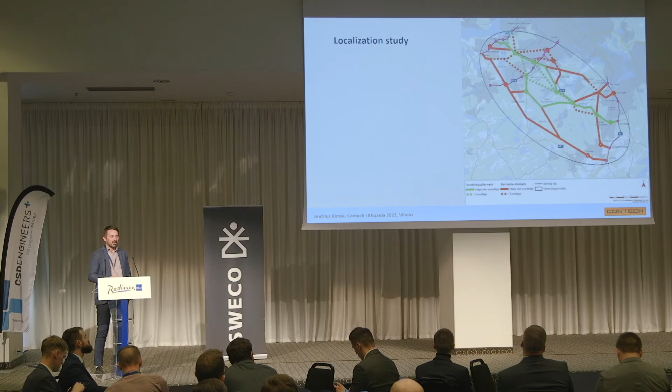A short example of how it operates in reality. When we're starting with the localization study, we're starting basically with some sort of political or economical decision. We need a road, which maybe starts there and ends up somewhere else, connecting two roads. And we're getting this spaghetti-looking plate of options, and from economical, political, social and technical points of view, we try to find the optimal way of localizing, in this case, a road.

The result of a localization study is that we came up with the most optimal line from all those points of view, and defined where we want to build the road, what kind of supporting structures we need, how it will be connected to the existing network, and so on. And then we go to the basic design phase based on that.

So the complexity of the digitalization, let's say, increases drastically, because previously you basically evaluate a lot of soft parameters, and then you're getting down to more or less technical issues. So normally what we do is a corridor kind of design, where we define what kind of road you want, how wide it should be, how many lanes, what should be in the middle between the lanes, how we form the ditches around, how we form the slopes.

In case of tunnels, how big tunnels we want. Is it 1 lane, 2 lanes, 3 lanes? Do we need any technical spaces and so on? So basically we're getting these typical sections. And normally, in a semi-automatic or automatic way, we can generate the layout of the entire structure we want.

So we're getting the vertical and horizontal profiles into 3D, generating enough detail in the design to be able to go to the public evaluation process: local counties, the normal public, any officials who have to evaluate the project. Based on that, we can start to work with environmental impact assessment plans, and a quite important and restricting factor, the land acquisition process.

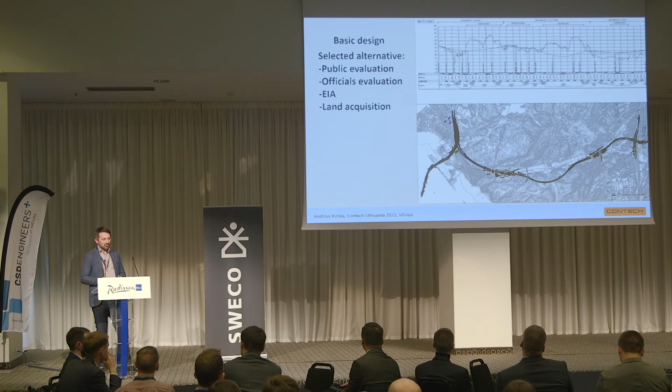So when we're at the stage of the basic design, we may be interested in a scale of meters, but then we go down to centimeters in the detailed design and have to solve all the small details. When it comes to tunnels, we do a lot of geotechnical investigation. We build our 3D models with the known existing structures, known weakness zones, or known variation in lithology or ground conditions, and based on that, define what technical issues we have to solve from the stability point of view.

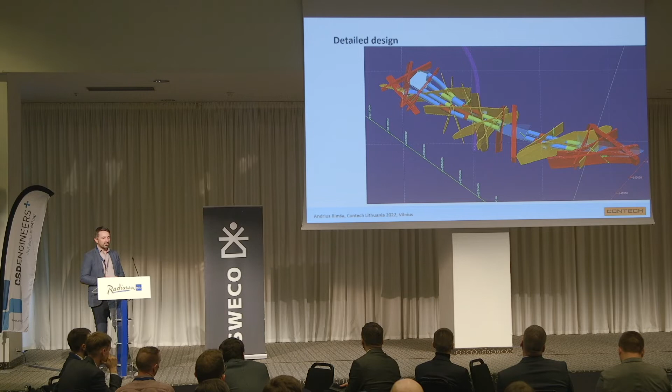The other thing which is important when we come to the detailed design is that tunnels are enclosed spaces. So we need a lot of cooperation and collaboration between the different technical areas to get enough space for drainage, electrical systems, ventilation, and structures in this combined tunnel space. So it's a lot of coordination work, even though from the technical or design point of view, a lot of it is basically semi-automatic processes.

We have a kind of defined straight reference line, and we adjust all our objects to that line, and all technical areas can collaborate in that way in this closed space.

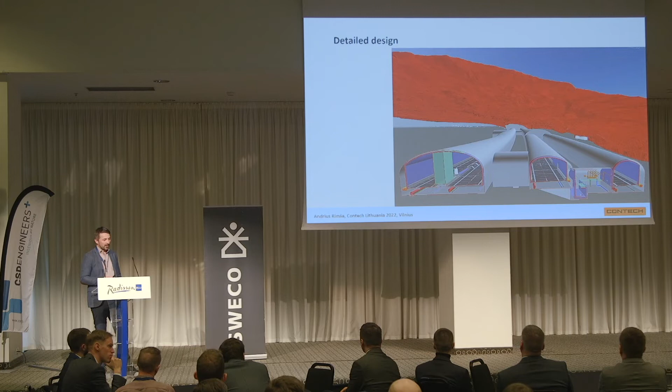So when we finish with our detailed design, we prepare the tendering documents, and normally it's a long list of paper documents describing requirements, what we want to be built, how it has to be built, and what kind of requirements have to be fulfilled by the contractor. And we prepare the bill of quantities.

We prepare 2D or 3D models as an illustration or as contract documents, and by tradition, as we used to do before, also even some drawings. Some drawings are just for illustration, but in some cases, depending on the degree of BIM modeling you do, maybe also address this time aspect for the construction period.

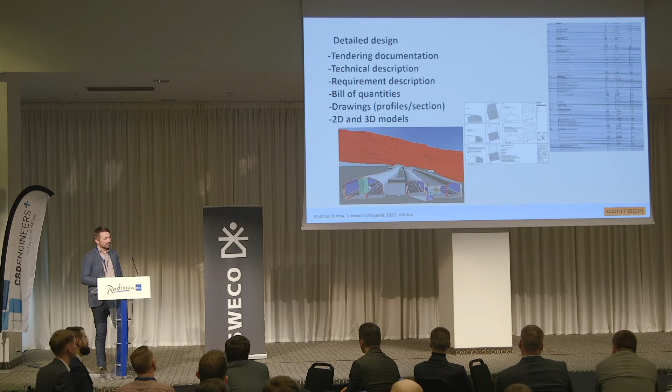So the contractor gets all these documents and then goes to the production site and starts building our tunnels. They follow the cycle: drilling, blasting, reinforcing, and going again. So in the end, we end up with a reinforced, structurally stable tunnel, which goes to the stage where we're installing water protection systems, usually shotcreting them for stability reasons, and then in the end, building the road in the bottom of the tunnel like any other road construction you're used to see.

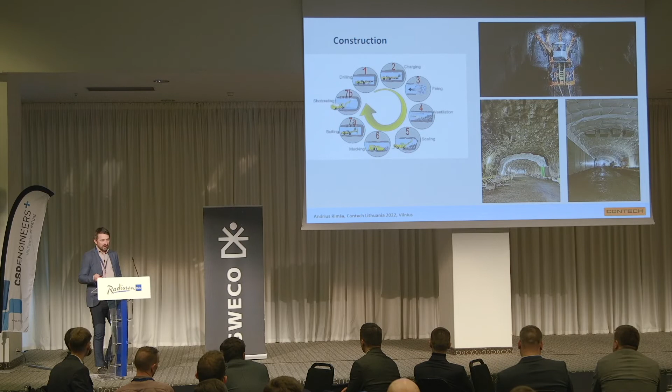What's happening after the construction period? Basically, the contractor finishes the construction works. It has to develop, update, and generate the as-built documentation. And unfortunately, from my perspective, and maybe from our clients' perspective, in Sweden at least, the as-built documentation is still done in 2D drawings, which are delivered at the end of the project.

One of the reasons is that the traffic administration is using a management system called BaTMan, Bridge and Tunnel Management System. And the limitation is that the management system can't accept 3D models. So that's a technical issue. It's continuously updating, and hopefully in the near future it will be possible.

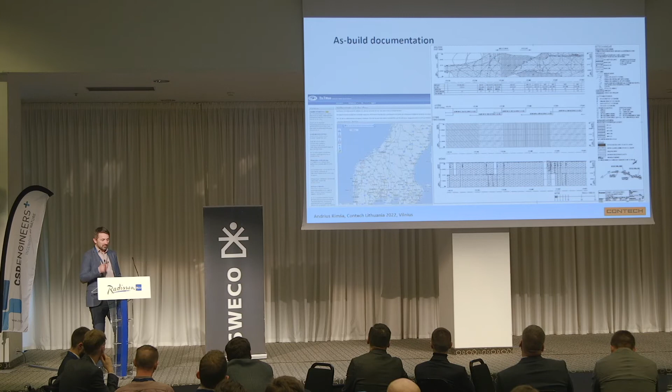But as of today, the as-built documentation, which then goes to the maintenance phase, is based on 2D drawings, and you can understand that if you're going to do any renovation, inspection, or improvement in your tunnels later on, then you have to go from your digital stage down to 2D drawings and start from there.

So to summarize, or maybe some takeaways for the discussions later at the tables after the meeting: what do we need to succeed with this digitalization in our engineering works? I think the important thing is it requires a long-time engagement from all the parties, both us as engineers or engineering companies, the contractors, and not least the clients.

And I guess the clients in that sense are important players to keep this ball rolling during the entire life process, because they are the only ones who are there from the beginning to the end. So it's hard to succeed if you're running it as a one-time test project or one specific project, one specific facility. It requires long time. It's a long-time competition, a long-time run, and requires that kind of engagement.

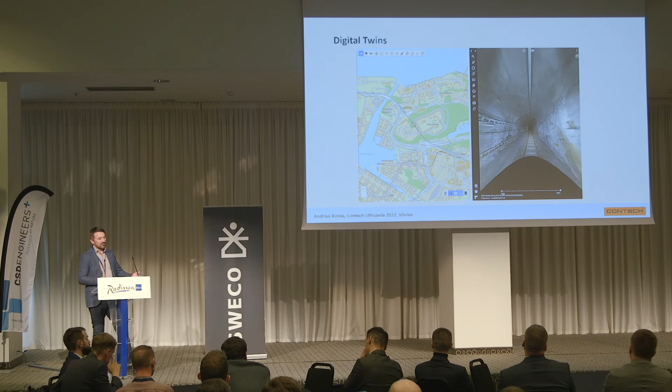The problem, of course, is you don't know what's behind the tracks. So the underground hidden structures are not visible and can hardly be easily digitized from the existing drawings. So it requires some time to get the full model.

And then the last slide, something I mentioned at the beginning: we're working on submarine structures. They are also hidden in a way, not accessible with the normal tools. And with our company, Loxus, we're doing underwater structure inspections and digitalization of them. That's done with so-called ROVs, remotely operated vehicles, which is a submarine vehicle connected with a cable to the operator, so you don't have to send divers. You can sit in your comfortable office and operate the ROV through the underwater structure.

In our case, we're working a lot with underwater tunnels or flooded tunnels in hydropower plants or in water supply systems, wastewater systems, and so on. And with that tool, we can get to places that are impossible to get to. With the collected data, we're able to generate the full 3D model of the tunnel, observe eventual damages and problem areas within the tunnel structure, and generate centimeter-precision detailed 3D models of the submarine structures.

In some cases, centimeter precision maybe is not enough. Depending on what kind of sensor you put on the ROV, you can do millimeter-precision photogrammetry studies if you have good enough conditions, or even use some submarine laser systems. So you can identify, depending on the task, what you want. You can get geometry, but you can also find the cracks in the concrete structures to be able to digitize them.